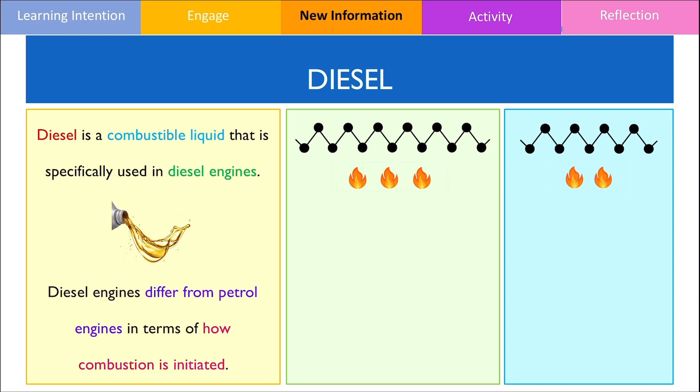Compared to petrol, the molecular weight of the components found in diesel is greater and thus they have a higher boiling point. Diesel engines operate differently compared to petrol engines in terms of how combustion is initiated. In petrol engines, a spark is required to start the combustion reaction, whereas no spark is required for a diesel engine. Instead, air is compressed to high pressures inside of a diesel engine to trigger the combustion process.

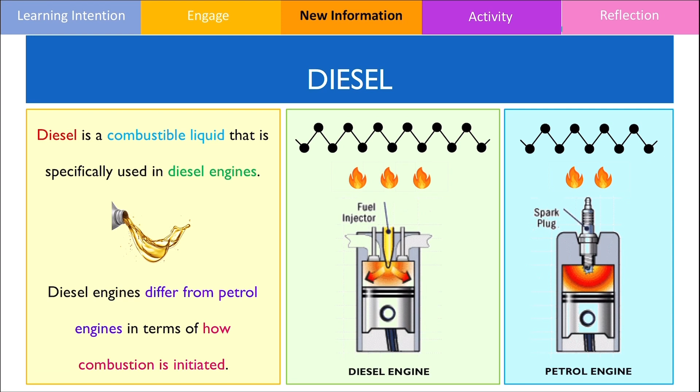This is nice to know information, and you won't really need to know how the two engines differ from one another at all. You'll often find diesel used as a fuel in larger scale engines such as boats, trucks, trains, and buses. Larger vehicles benefit from having a diesel engine compared to petrol engines to complete heavy work.

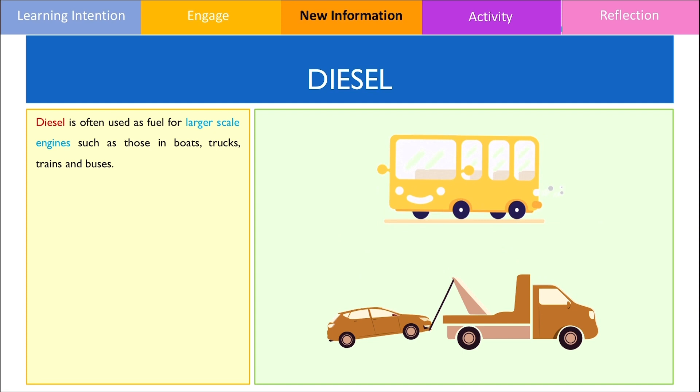Overall, diesel engines have better fuel economy compared to their petrol engine counterparts. This means that diesel vehicles would be able to travel greater distances compared to vehicles running on petrol with the same amount of fuel. This is because diesel engines are more energy efficient, which means that the efficiency of the energy transformations to convert chemical energy into mechanical energy is higher. Diesel engines also produce 10 to 20% less carbon dioxide emissions than petrol.

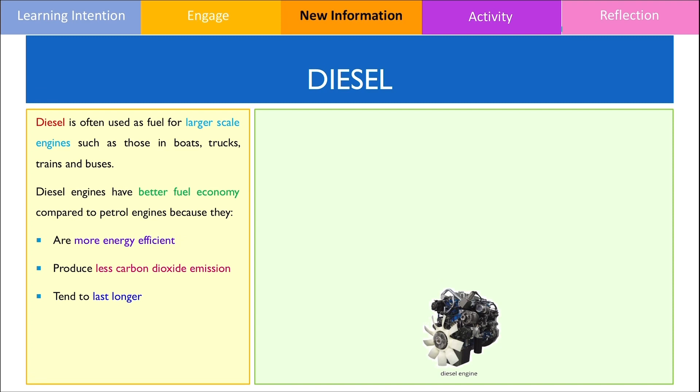As an energy source, diesel is more dense compared to petrol, thus yields more energy per litre, and as a result, diesels tend to last longer. Diesel exists in two forms, but the main form of diesel is petrodiesel, and as the name suggests, it is derived from the distillation of crude oil. There is one other pathway to produce diesel. An alternative to petrodiesel is biodiesel.

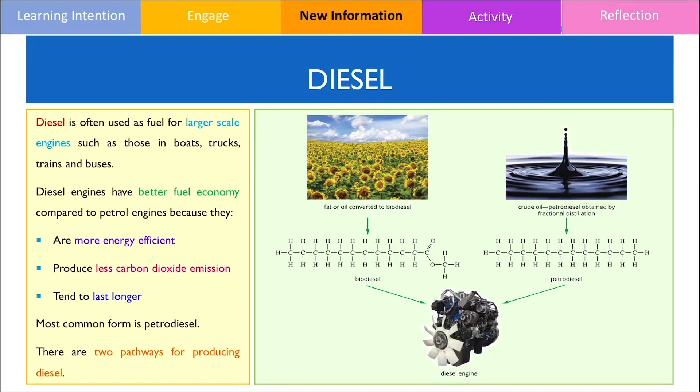I would like to emphasize again that both petrodiesel and biodiesel are not pure substances. Petrodiesel is a mixture of long-chained hydrocarbons. Around 75% of them are alkanes and the remaining 25% are aromatic hydrocarbons, which means they contain this benzene ring, which is a 6-membered carbon ring with alternating single and double bonds.

On the other hand, biodiesels are fatty acid esters which contain the COO functional group. Generally, this section of the fatty acid ester is a methyl group which derives from the methanol, which was a reactant used during the transesterification to create the biodiesel. By comparing these structures, you might have also recognized that petrodiesel contains no oxygen atoms, whereas biodiesel does because it has the ester functional group.

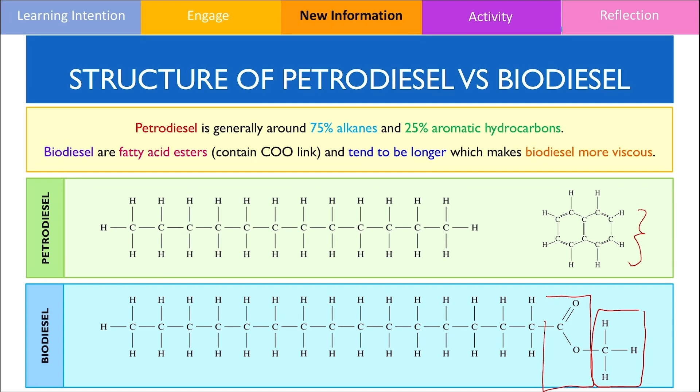Furthermore, the carbon chain lengths tend to be longer in biodiesel components compared to petrodiesel, which makes biodiesel more viscous. Viscosity is related to the ease of flow of a liquid. The higher the viscosity, the slower the flow. The viscosity of a substance is dependent on the polarity of the substance and the types of intermolecular forces it can form. Let's examine the chemical structure of both forms of diesel to determine which is more viscous.

Unlike petrodiesel, biodiesel contains an electronegative element, thus making it a polar molecule. As a result, the types of intermolecular forces present between biodiesel molecules are dispersion forces and dipole-dipole bonds. In contrast, petrodiesel is nonpolar and can only form dispersion forces. Because biodiesel molecules are longer and form stronger intermolecular forces, the biodiesel chains are close to each other, thus making the liquid thicker and viscous. And this explanation is summarized over here. Viscosity is an important feature of a fuel because it helps lubricate the cylinders in an engine.

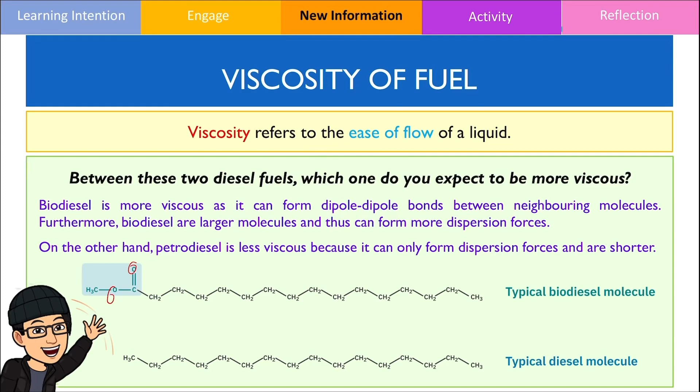Another property on which we'll be comparing the two diesel fuels is hygroscopicity. Hygroscopic is a property used to describe a material that has the ability to attract and absorb water from the surroundings. Similarly, we can identify which fuel is more hygroscopic based on the polarity of the substance and the types of intermolecular forces it can form. We can expect that biodiesel is more hygroscopic than petrodiesel because it is a polar molecule and can interact with water molecules because it is able to form hydrogen bonds.

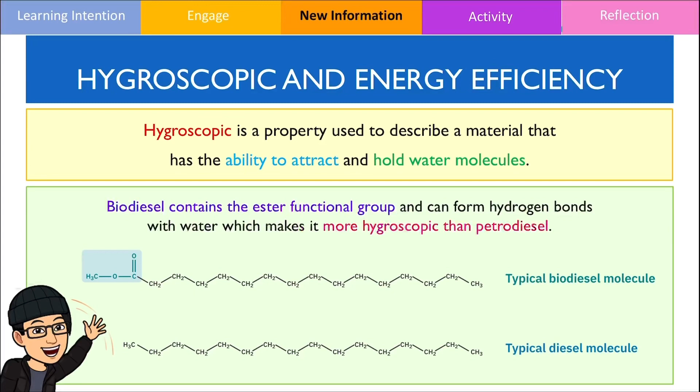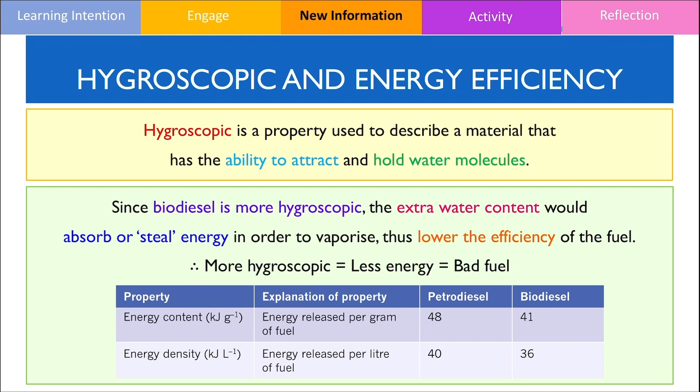Unlike viscosity, a hygroscopic fuel is not a good feature for a fuel. This is because the extra water content that's absorbed into the biodiesel fuel would have stolen some of the energy used to combust the fuel. As a result, biodiesel is less efficient compared to petrodiesel, and this is reflected in the table down below.

By comparing the hygroscopicity and the viscosity of both diesel fuels, we should expect petrodiesel to flow more easily through a pipeline compared to biodiesel. Because biodiesel is more viscous, it is not a suitable fuel type in colder climates because it can gel up, solidify, thereby impairing the flow inside of a car engine.

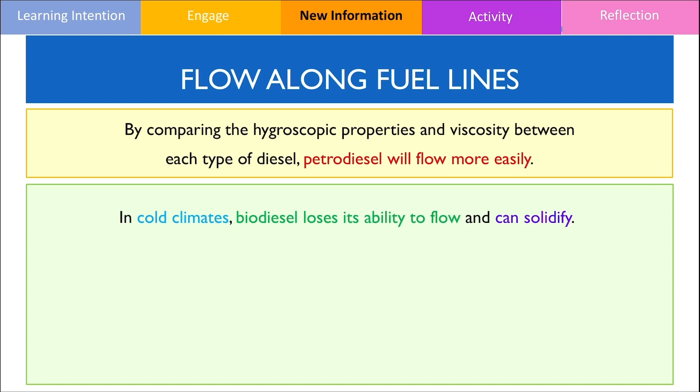To avoid this issue, antifreeze additives are blended into the biodiesel fuel if used in colder climates. This property to thicken up at low temperatures is referred to as the cloud point. Therefore, we can say that biodiesel has a higher cloud point compared to petrodiesel.

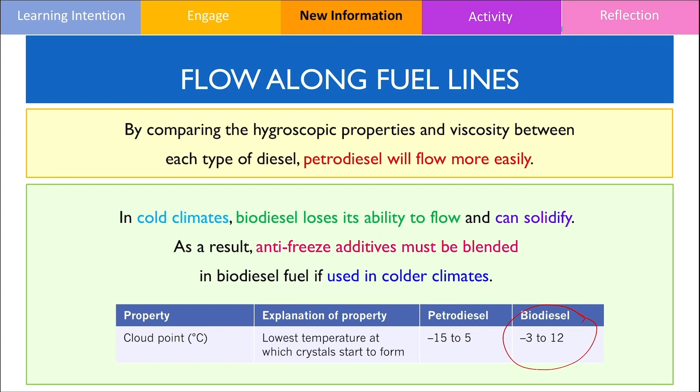The main combustion products of both forms of diesel are carbon dioxide and water, with the energy content of each fuel being quite comparable to one another. As with all engines, other air pollutants are also emitted from the combustion of petrodiesel and biodiesel. Carbon monoxide is also produced from the combustion of both fuels, but less carbon monoxide is produced with biodiesel since it also contains oxygen in the chemical structure.

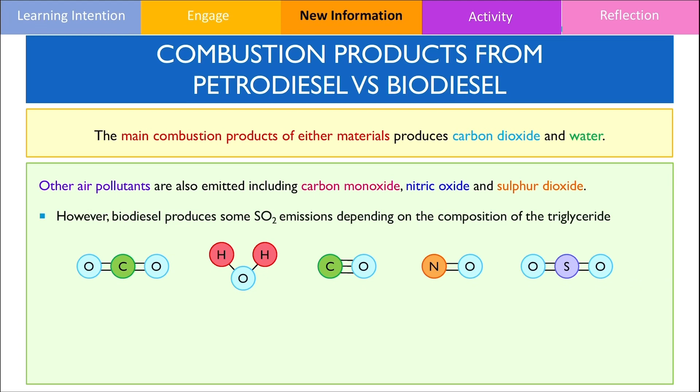Nitric oxide and sulfur dioxide are also emitted from the combustion of both fuel sources. However, SO2 emissions vary with biodiesel as it depends on the origins of the triglycerides. Because diesel vehicles have better fuel economy and are more efficient, they provide better mileage and produce 10 to 20% less carbon dioxide than petrol vehicles with the same amount of fuel.

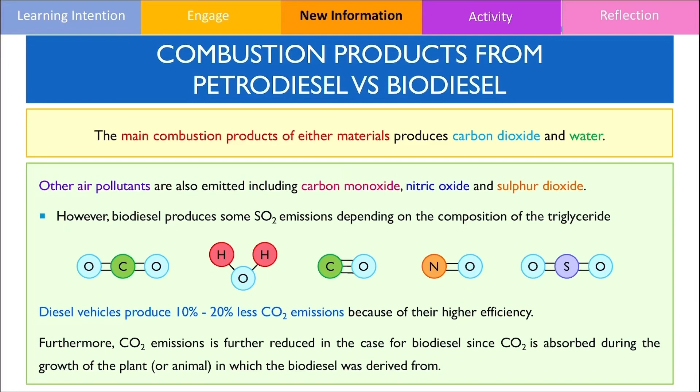Furthermore, carbon dioxide emissions are further reduced in the case of biodiesel since carbon dioxide is absorbed due to photosynthesis during the growth of the plant from which the biodiesel was derived. I would now like to discuss the environmental impacts related to sourcing and producing both forms of diesel.

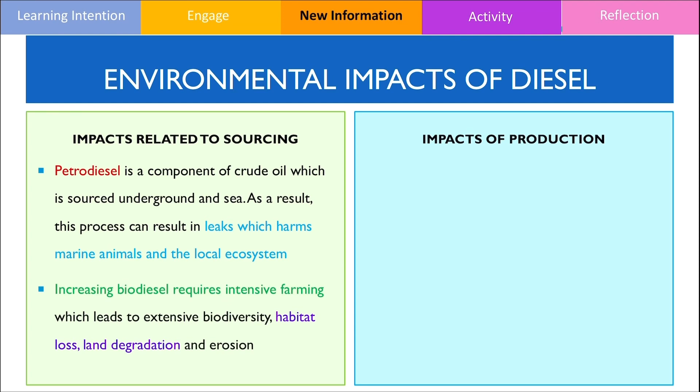Because petrodiesel is derived from crude oil, it would need to be extracted by drilling underground and undersea. As a result, this process can result in leakage which harms marine animals and the local ecosystem. In regards to biodiesel, we need to extract the triglycerides found in crops. In doing so, this requires intensive farming which may lead to habitat loss, land degradation, and erosion.

The issue related to the production of petrodiesel would be that some energy would be required to operate the refinery. As a result, carbon dioxide emissions are also released in this process. If the demand and production of biodiesel was to increase in the future, this can actually increase the prices of crops and therefore raise concerns whether we should be using the crops for food or for fuel.

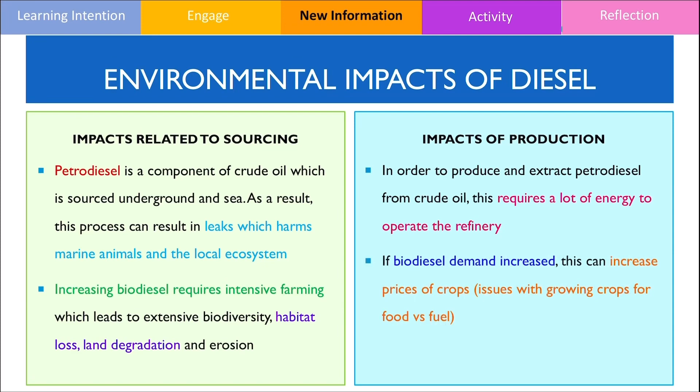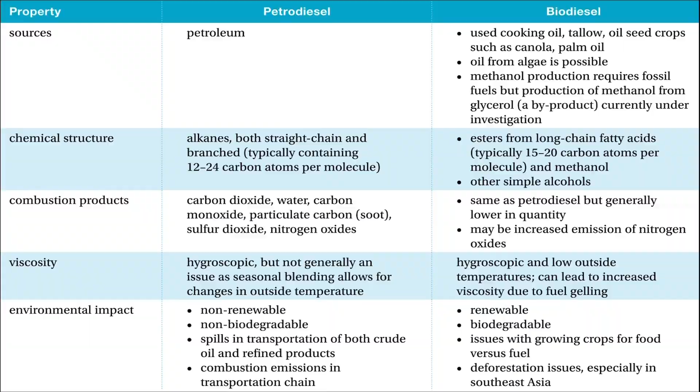On the next slide, I've got a nice summary that shows the differences between petrodiesel and biodiesel. I won't go through the content of this, but I would highly recommend that you refer to this table for your revision. Now that we've covered all the content, I would now like you to check your understanding by answering this question. Please pause this video now and then we'll compare our answers together.

In the first statement, it says the fuel molecules consist of hydrogen atoms and carbon atoms. This is a characteristic that's only found in petrodiesel because biodiesel also contains the functional group COO. As a result, this cannot be the answer. The second statement reads the combustion of the fuel produces gases which contribute to the greenhouse effect. This is going to be true for both fuels because they both produce carbon dioxide, water vapor, as well as traces of carbon monoxide and other air pollutants.

In the third statement, it reads, during the industrial production, the fuel is produced in a chemical reaction. The key part over here is the words chemical reaction, and the only process that involves a chemical reaction is the transesterification reaction that is taking place to produce biodiesel.

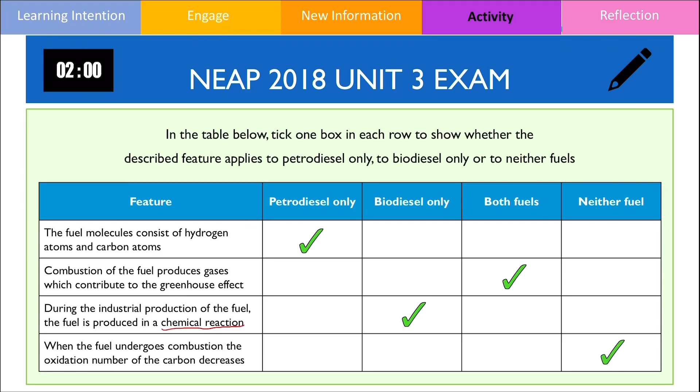The last statement says, when the fuel undergoes combustion, the oxidation number of the carbon decreases. If you actually write down the combustion reaction for both the biodiesel as well as the petrodiesel, you'll find that the oxidation number will always increase. As a result, the answer is going to be neither fuel. By now, you should be able to meet all the success criteria outlined in this video.